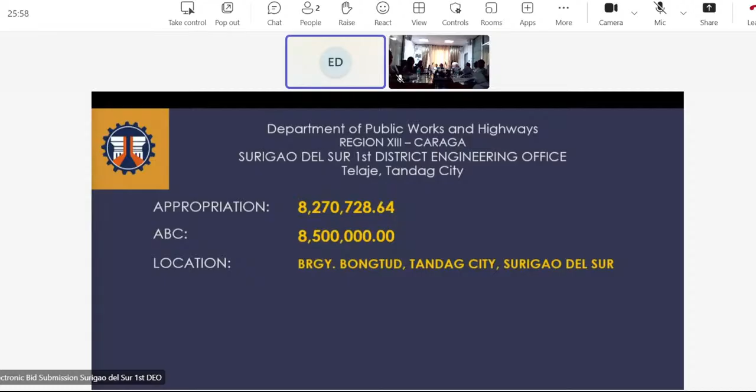Good morning, everyone. For our first project, we have contract ID 25NH0140. Project title: Repair/Rehabilitation of Classrooms, Bongtud Elementary School, 132960, Barangay Bongtud, Tandag City, Surigao del Sur. Bidding date is on November 18, 2025. Appropriation is 8,270,728.64 pesos. The ABC is 8,500,000. Location: Barangay Bongtud, Tandag City, Surigao del Sur.

Physical target: 15 numbers of classroom. Project scope: repair/rehabilitation of school classrooms. Project duration follows.

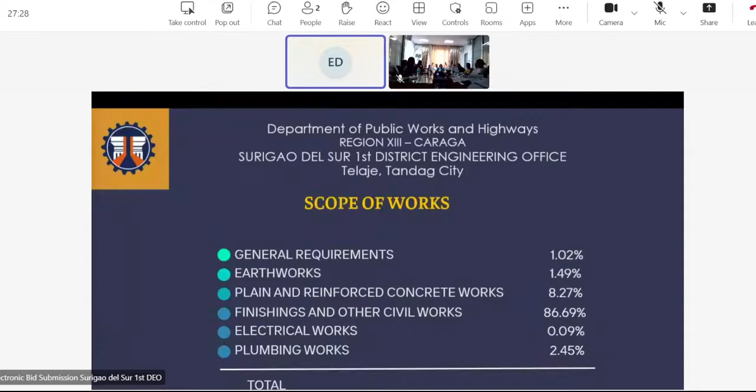Scope of works: first, general requirements, 1.02%. Earthworks, 1.49%. Plain and reinforced concrete works, 8.27%. Finishings and other civil works, 86.69%. Electrical works, 0.09%. And plumbing works, 2.45%, with a total of 100%.

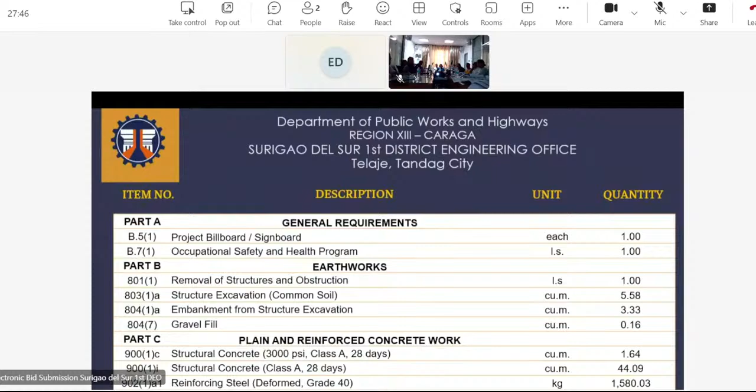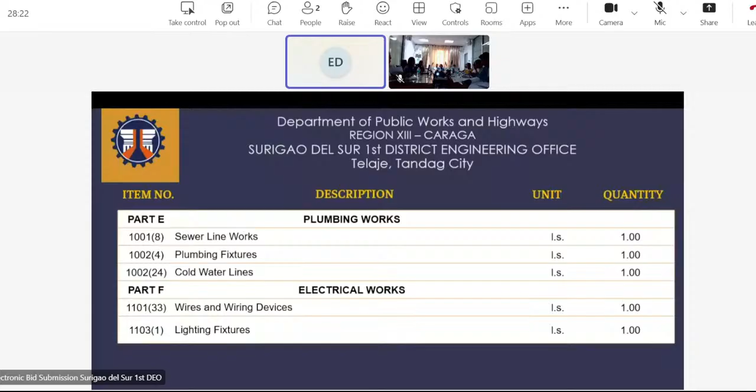For the item number, description, units, and quantities for Part A, general requirements, Part B, earthworks, and Part C, plain and reinforced concrete work are shown. Next, the item number, description, units, and quantities for Part D, finishings and other civil works are shown, including its continuation. Next, for Part E, plumbing works, and Part F, electrical works are shown.

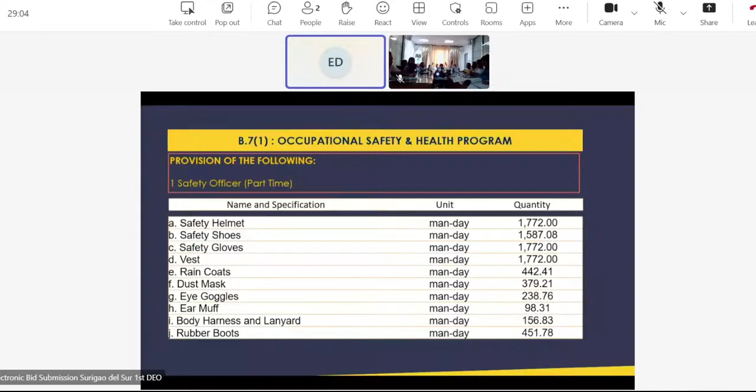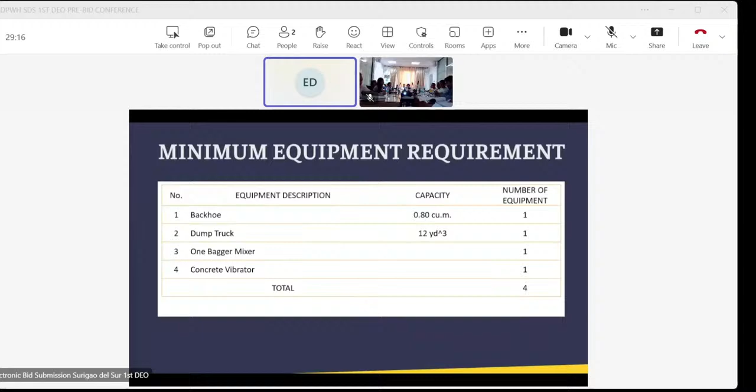Project billboard: we have 1 unit of 4x8 DPWH tarpaulin and 1 unit of 8x8 COA tarpaulin. For occupational safety and health program, provision of 1 safety officer part-time. Name, specification, unit, and quantities are shown. For the minimum equipment requirement, we have backhoe 1, dump truck 1, bagger mixer 1, and concrete vibrator 1, with a total of 4 numbers of equipment.

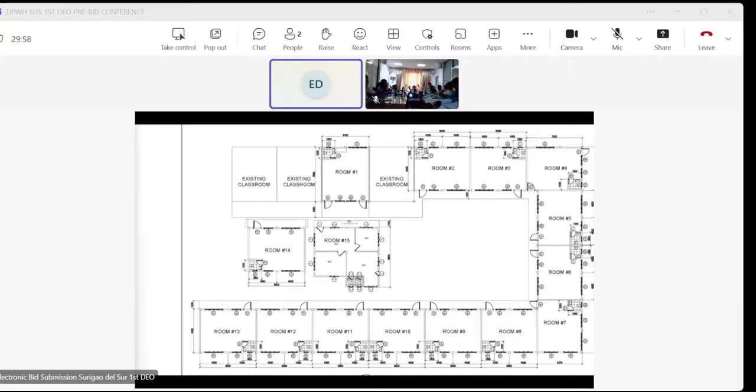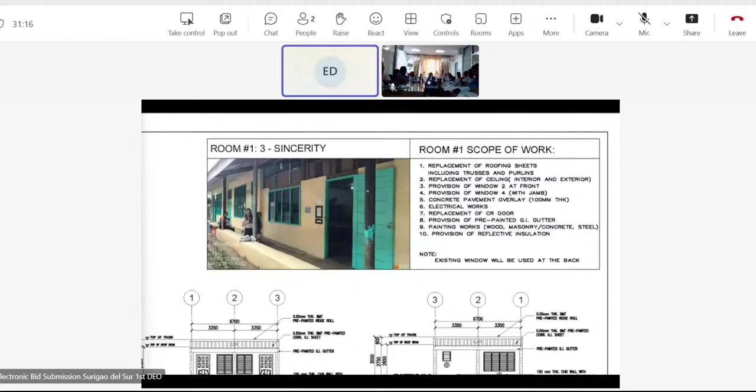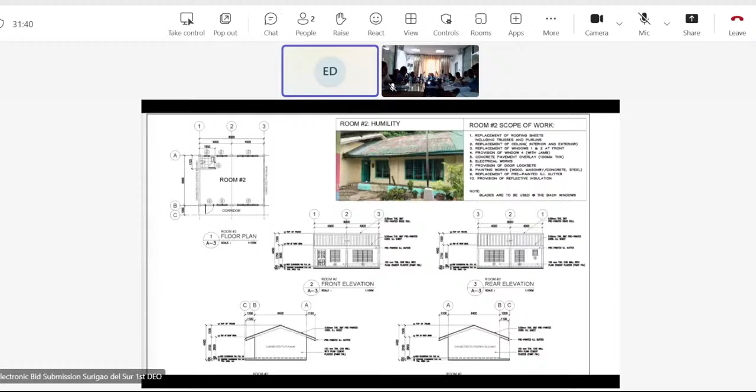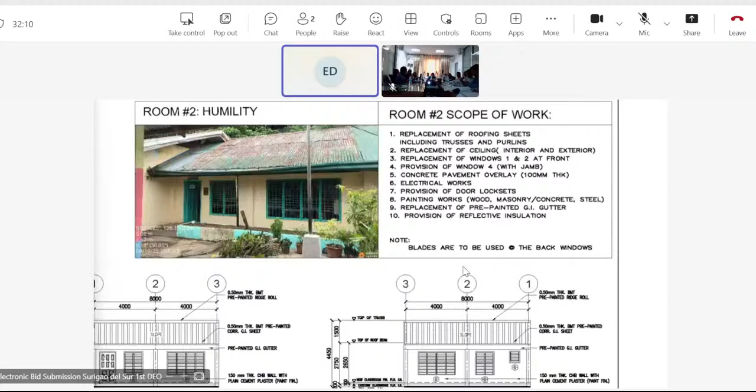Next, for room number 2, again we have the floor plan, the front elevation, rear elevation, the right side elevation, and the left side elevation. The scope of work is the same as room number 1: replacement of roofing sheets, replacement of ceiling, replacement of windows 1 and 2 at front, provision of window 4 with jamb, concrete pavement overlay, electrical works, provision of door locks and lock sets, painting works for wood, masonry and steel, replacement of pre-painted GI gutter, and provision of reflective insulation.

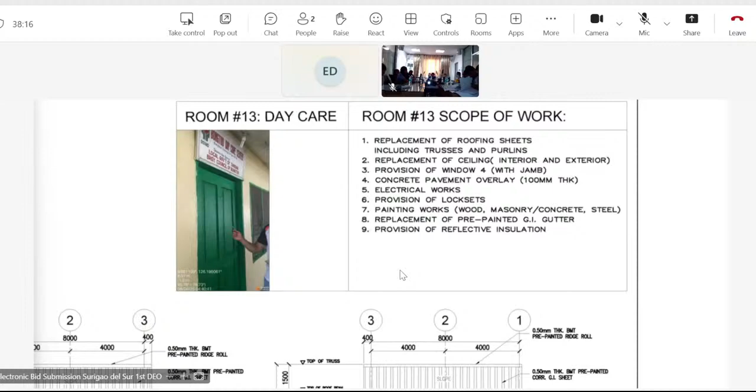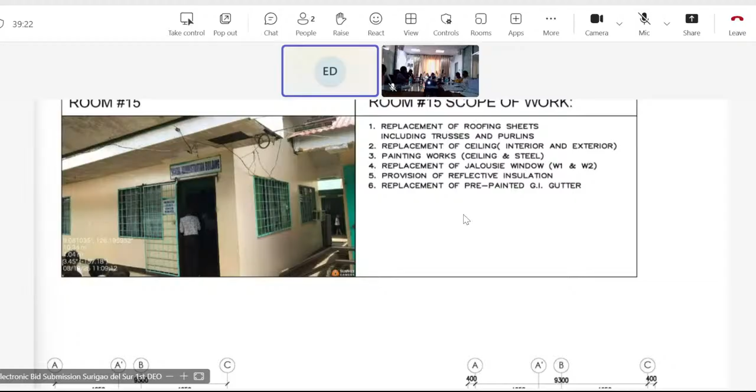For room 15, we have the floor plan and the roof plan. Scope of work: replacement of roofing sheets including trusses and purlins, replacement of ceiling interior and exterior, painting works for ceiling and steel, replacement of jalousie window, provision of reflective insulation, replacement of pre-painted GI gutter.

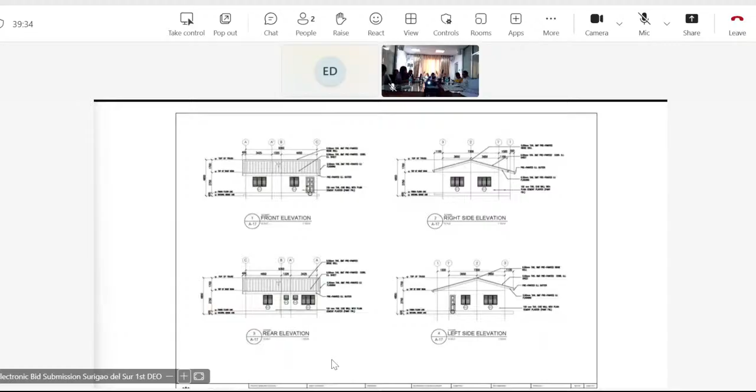For room 15, we have the front elevation, right side elevation, rear elevation, and left side elevation. Next, the schedule of doors and windows and grills detail.

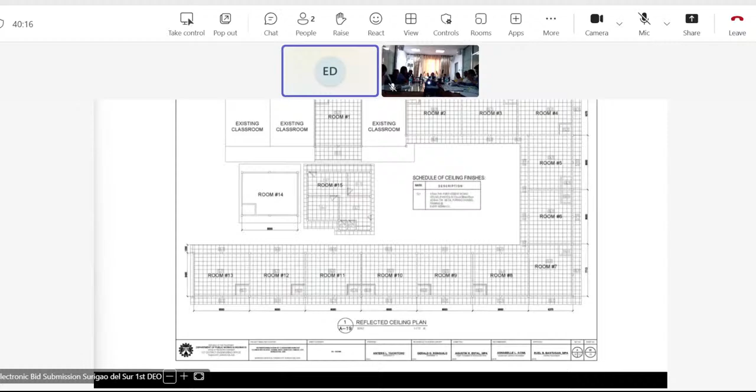Next, we have the reflected ceiling plan only for room 1 to 13 and 15. Room 14 is not included.

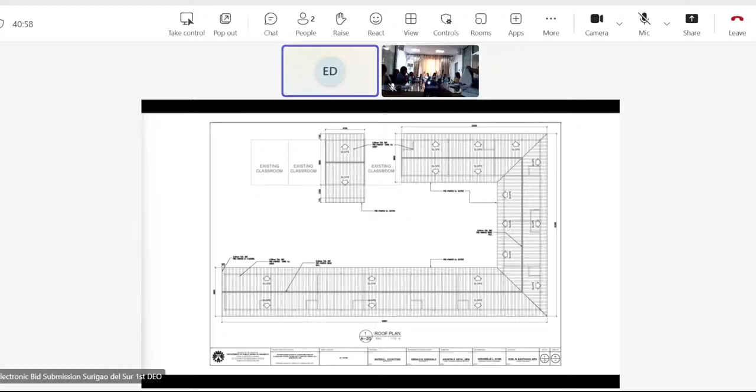Next, for structural plans, we have the foundation plan for room 1, detail of wall footing, detail of columns and footings, and stiffener footing detail.

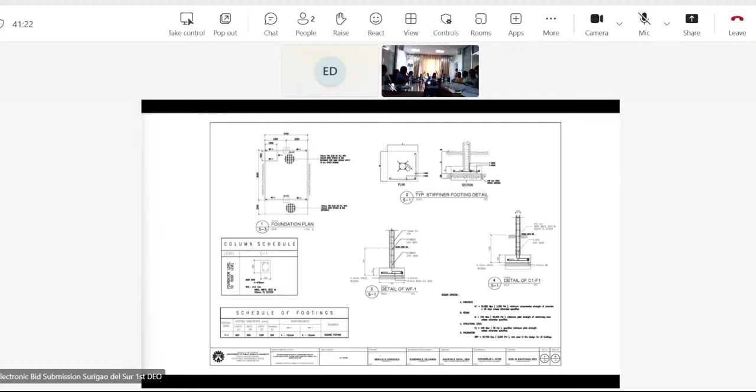Next, for room 1, roof beam plan, roof framing plan, and the fascia frame detail. Also the truss detail and truss connection details.

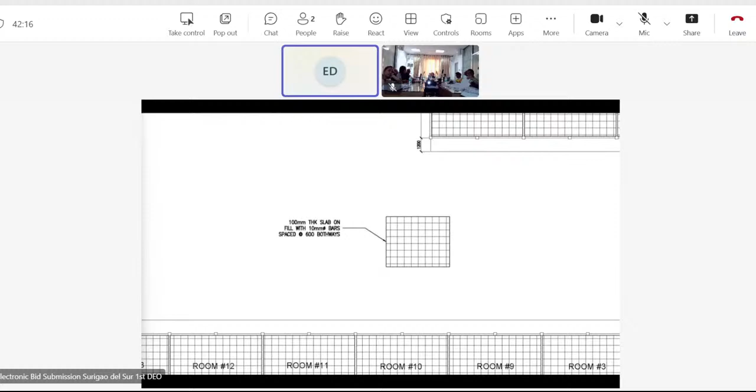Next, for roof framing plan from room 2 to room 13.

Next, we have truss 1, truss 1B and 1A, and detail of gusset plate. Again, detail of gusset plate for the half truss, which we also have.

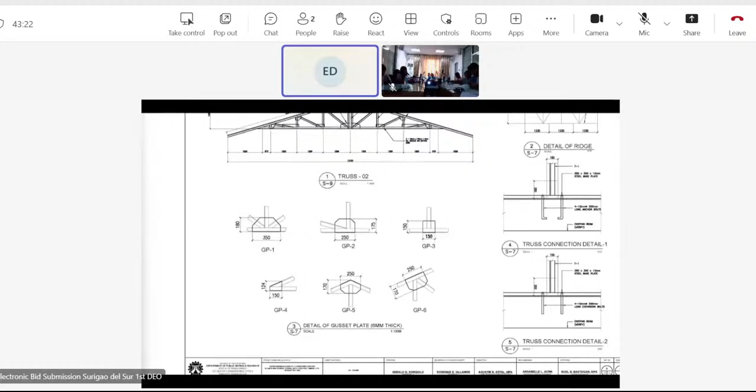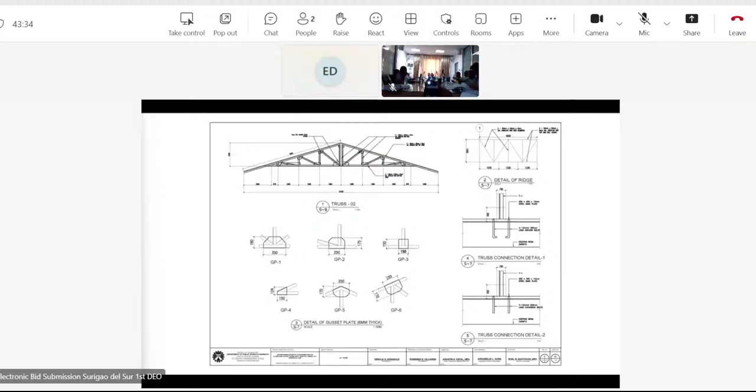Next, truss 2 and truss 2 gusset plate detail. We also have the detail of ridge truss connection detail 1 and 2, and connections, purlin connection detail.

Roof framing plan for room 15. Truss 1 detail for room 15. Truss 2 detail for room 15 and gusset plate detail.

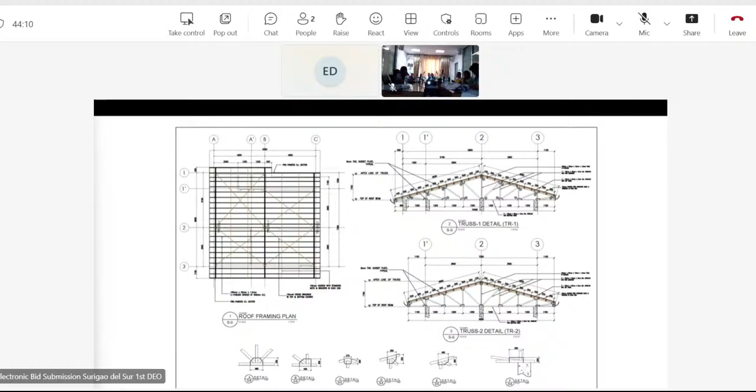Continuation for room 15, we have the sectional elevation, ridge road connection detail, and truss connection details.

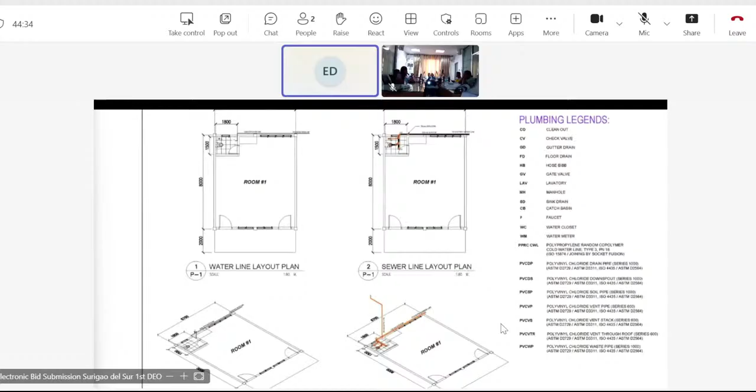For plumbing plan, we have the water line layout plan for room 1 only, the sewer line layout plan, and the isometric view for the water line layout plan and sewer line layout plan.

For electrical plan, we have the electrical lighting layout plan.

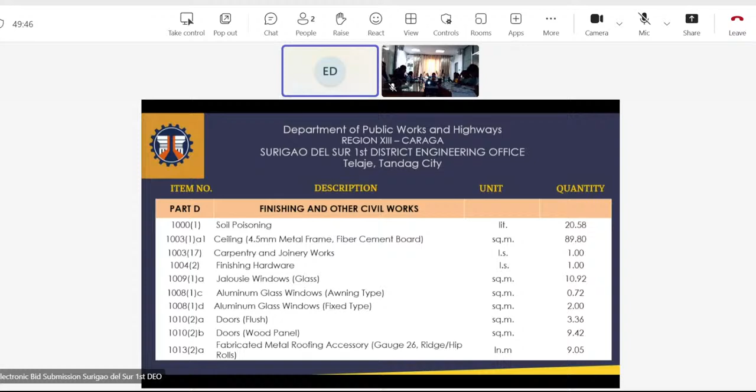Continuation on Part D, the item number, project item description, unit, and quantity are being shown.

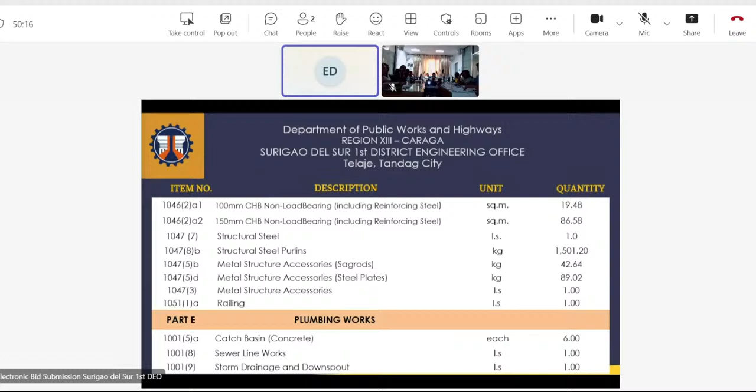Also the Part E. Continuation on Part E with Part F, the item numbers and the description, also with its unit and quantity, are being shown.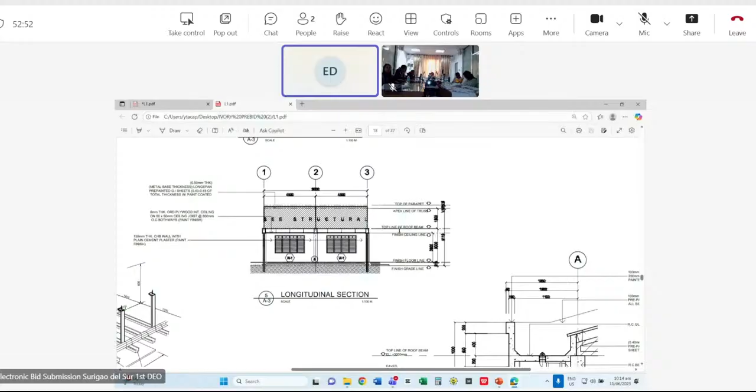Also shown is the isometric ceiling detail, and also the detail on the concrete gutter.

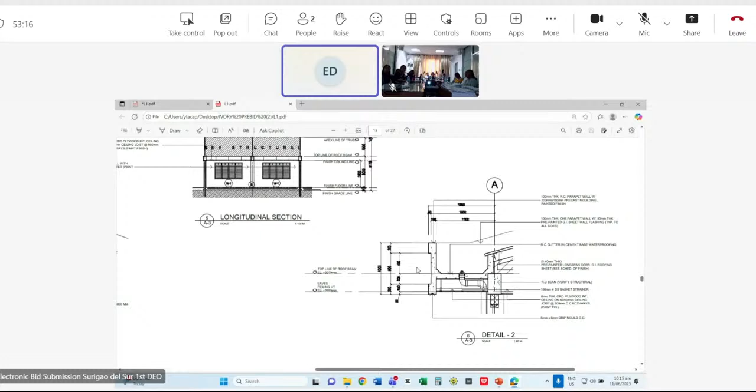Next is the detail of the PWD ramp.

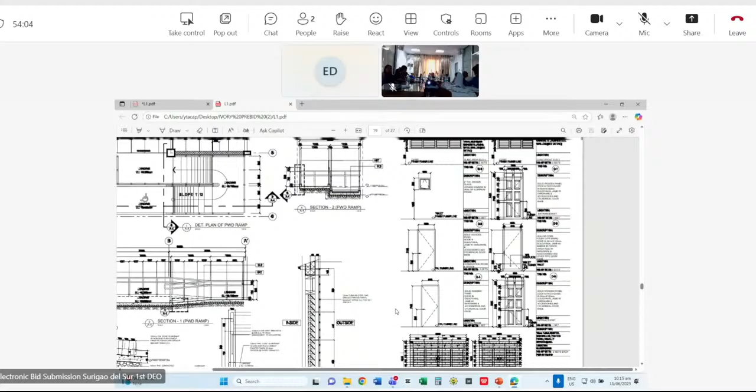The detail of columns and footing.

Also the details of the wall footings and the footing tie beams.

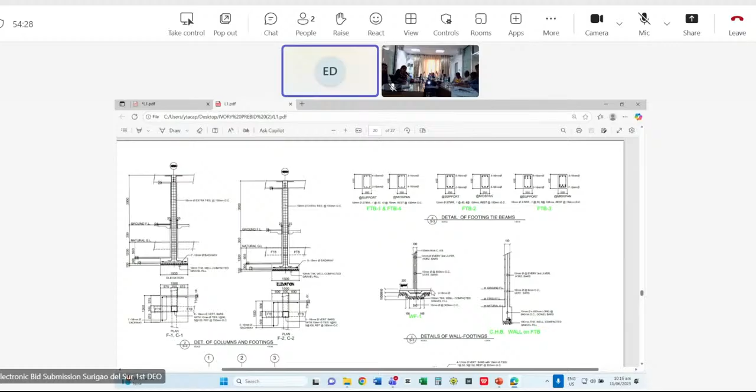The foundation plan and the stiffener column detail.

Next is the roof beam detail and the end wall detail. Also with the detail of the GB, LRB, and PC.

Here is also the detail of the RC gutter and the section of stair on fill and RC ramp.

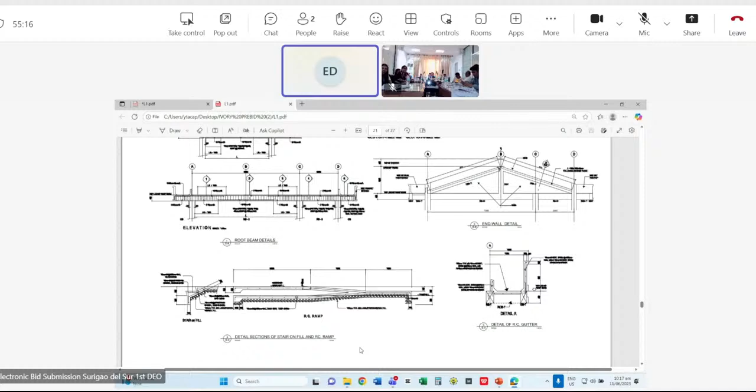The detail of elevation of truss.

Here's the detail of the trusses connection.

Also the detail of connection of purlin to top chord, roofing fixer, and isometric view of connection of roofing to purlin.

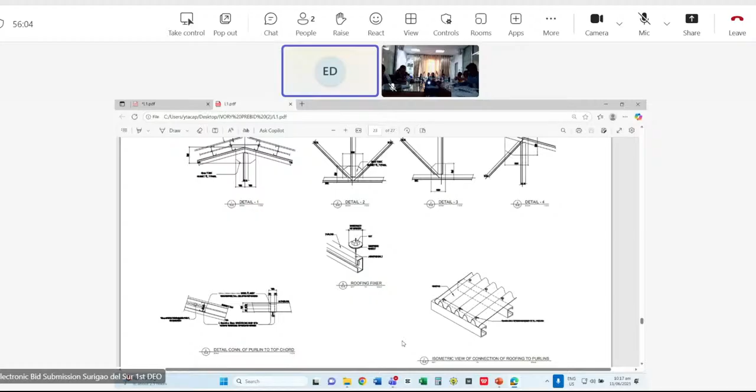Here is the detail of truss anchorage and the connection of purlins to end wall.

Also the J-bolt spacing, roof panels, side lap detail, and detail of purlin to sagrod connection.

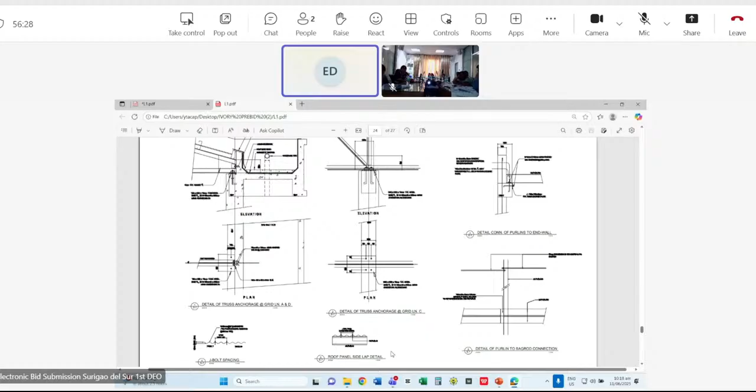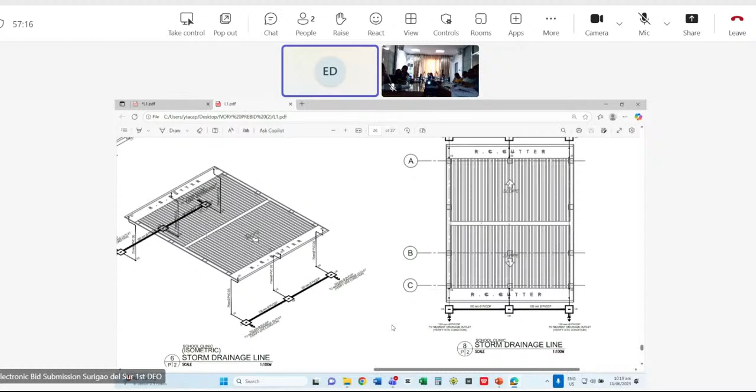Here's the storm drainage line, also with the isometric.

And the water line with also the isometric.

Here is the electrical plan with its schedule of loads and computation. That's it, thank you.

In terms of my clarifications? Yeah, okay.

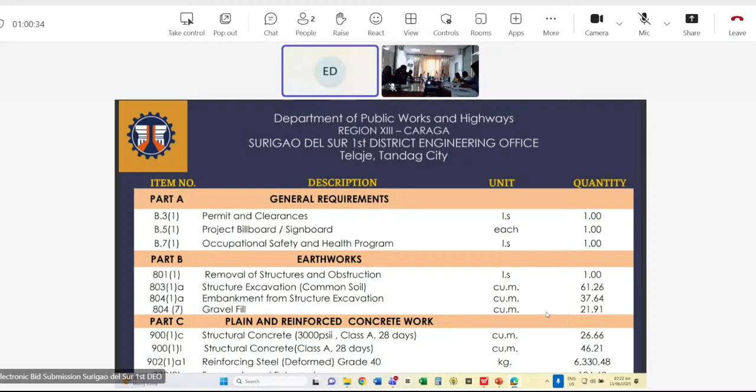The item, description, unit, and quantity for Part A, Part B, and Part C are shown, along with the item number, description, unit, and quantity for Part D.

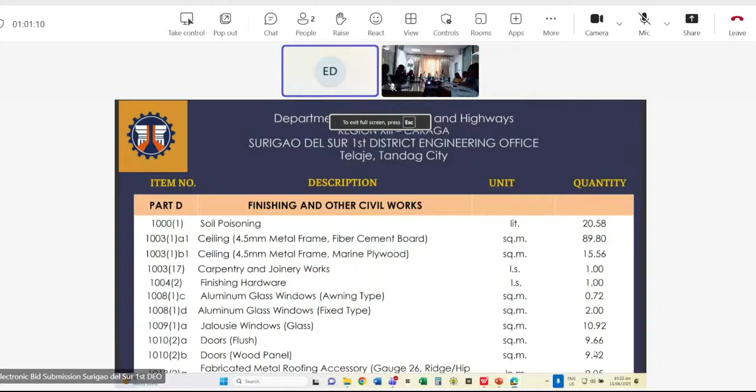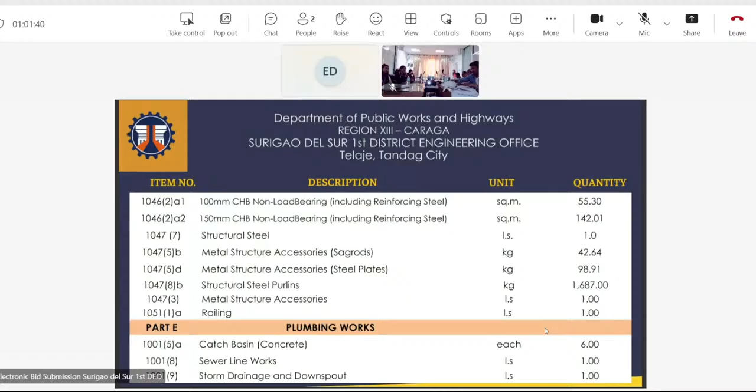The continuation of Part D, showing item number, description, unit, and quantity, is shown, along with Part E and the continuation of Part E with item number, description, unit, and quantity, also with Part F.

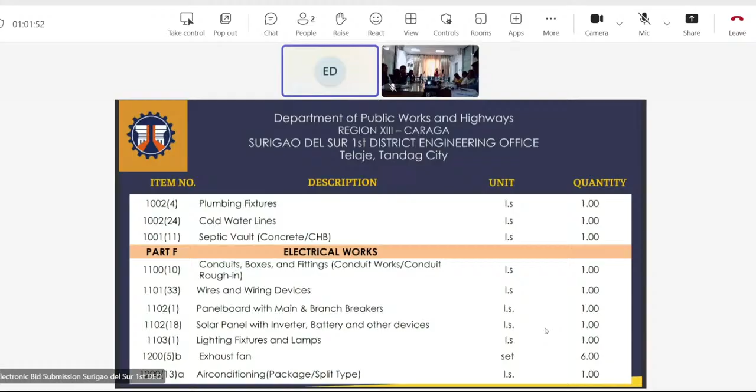Item B.5, project billboard, has 1 unit 4x8 DPWH tarpaulin and 1 unit 8x8 GOA tarpaulin. B.7 is the occupational safety and health program. The minimum equipment requirements shown are: backhoe, 1 bagger mixer, dump truck, plate compactor, concrete vibrator, bar cutter, bar bender, and welding machine.

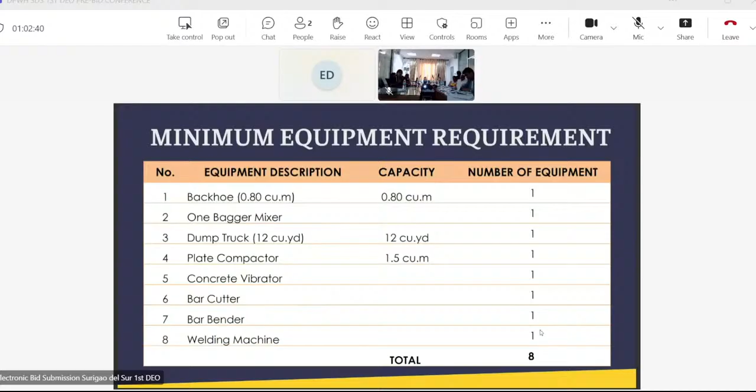The plans show the perspective for the water sanitation.

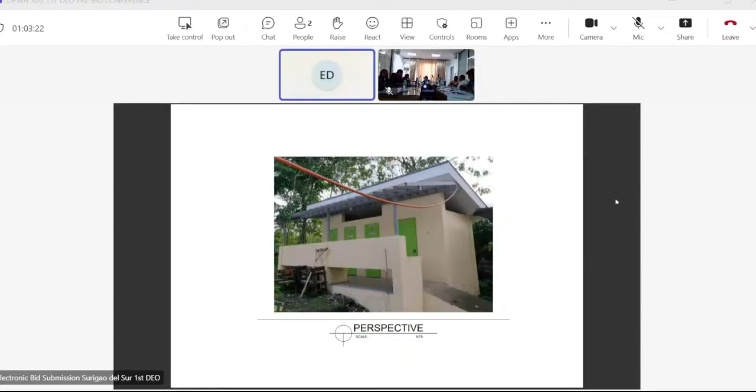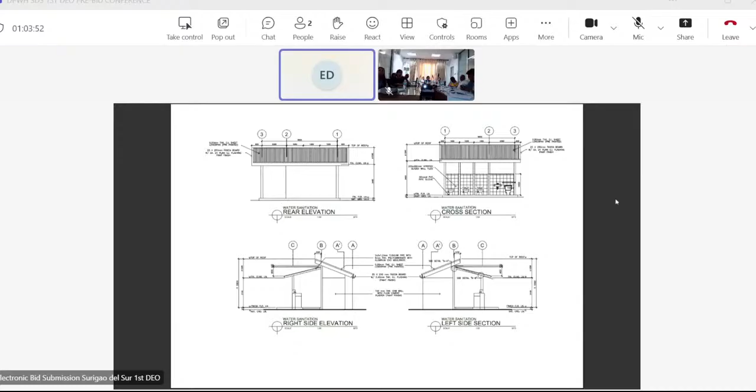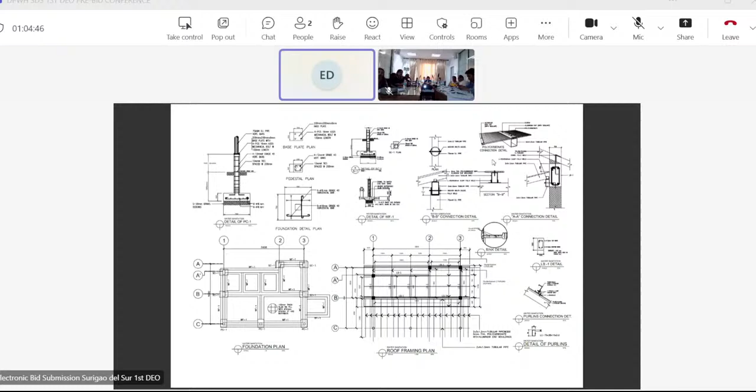Next is the group hand washing perspective. Shown is the floor plan, front elevation, rear elevation, right and left side elevation, longitudinal section, blow up section, roof plan, and roof framing plan.

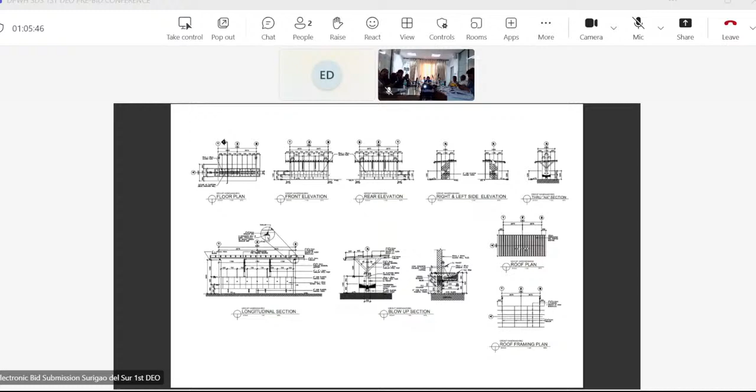Next is the foundation plan, longitudinal section details, hand washing counter details, footing beam detail, base plate detail, planted column, and typical detail for lined canal.

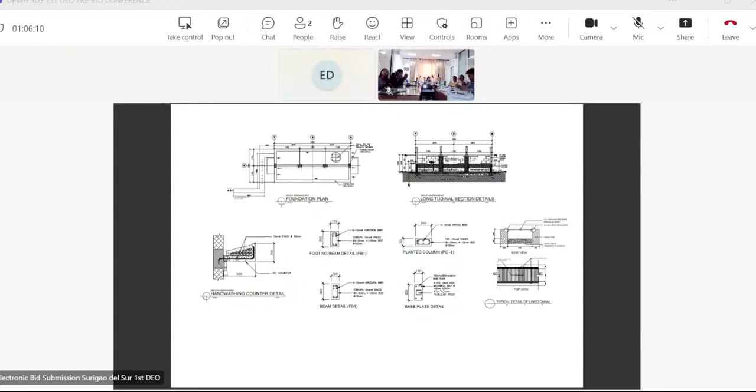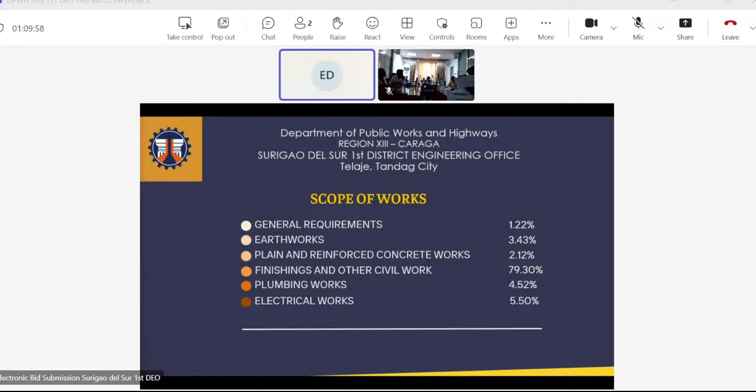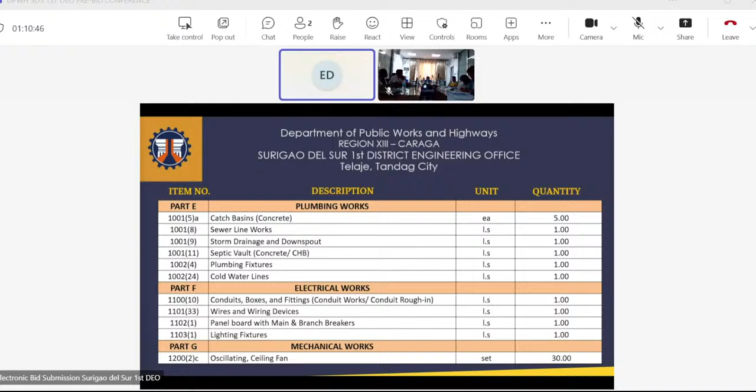The item number, description, unit, and quantities for Part E plumbing works, Part F electrical works, and Part G mechanical works are shown. Project billboard: we have 1 unit 4x8 DPWH tarpaulin.